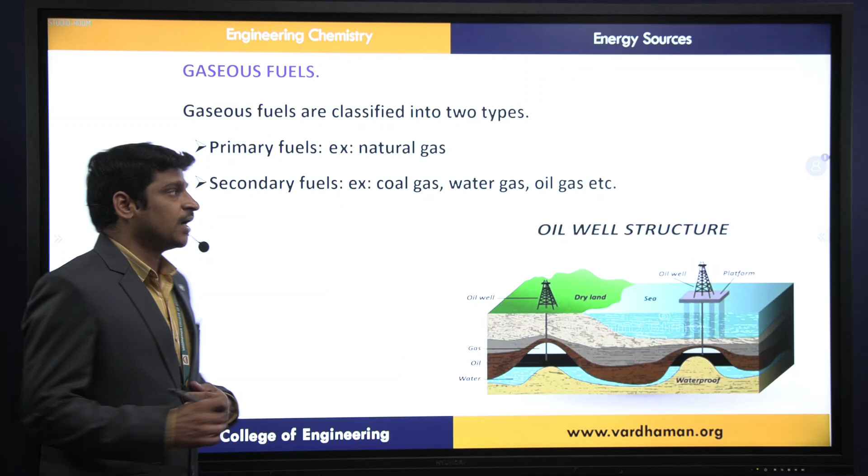Coming to gaseous fuels, as we already discussed the advantages of gaseous fuels over liquid and solid fuels, these gaseous fuels have high calorific value and low ignition temperature and burn cleanly without causing pollution. Based on origin, they are classified into two types: primary gaseous fuels and secondary gaseous fuels. Primary gaseous fuels are those originated from natural sources, best example being natural gas. From these natural gases, different gases are synthesized or fractioned, and those are called secondary fuels.

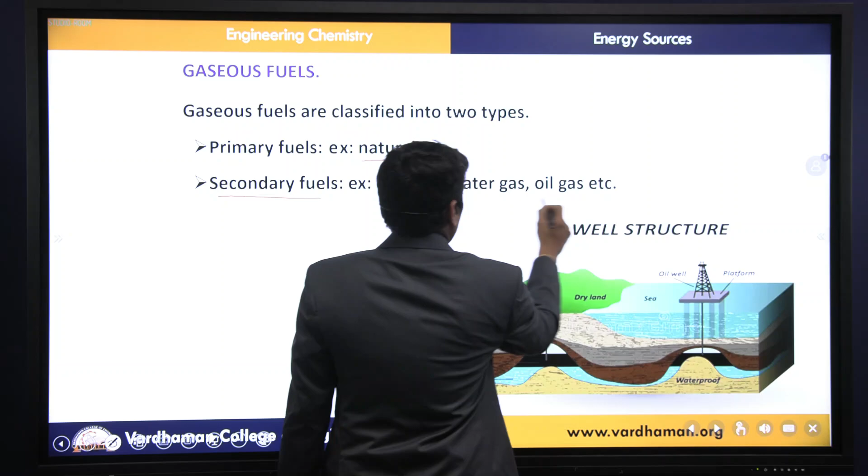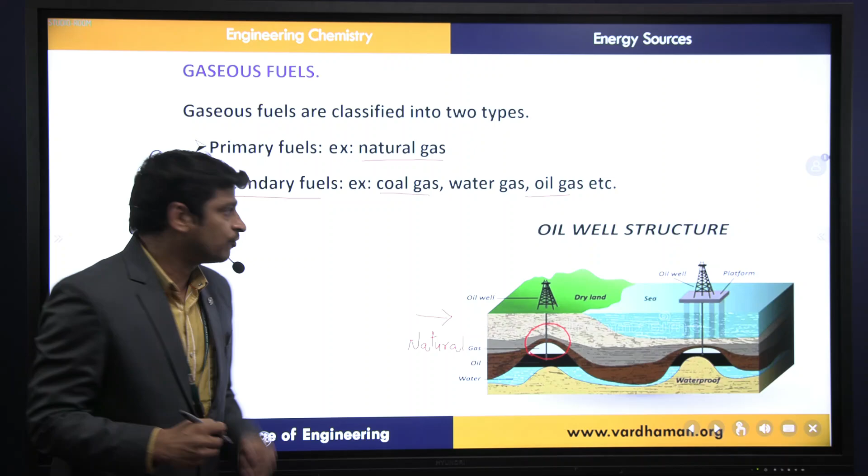For example, coal gas, water gas or oil gas. Now coming to this picture which explains oil well structure, the gases which are accompanied along with the oil in the oil wells are called natural gases. These natural gases are extracted and further treated to form secondary fuels or secondary gases.

Coming to the first type of natural gas, the composition of natural gas: it contains a maximum percentage of methane, about 88.5%, then ethane 5.5%, propane 3.7%, and butane 1.8%. It also contains little traces of pentane, hydrogen, carbon monoxide, carbon dioxide and some higher hydrocarbons in a range of 0.5%.

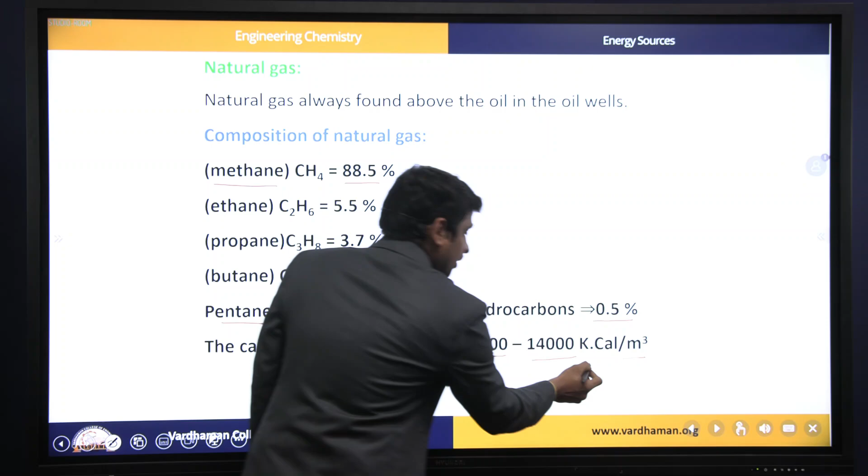The calorific value of natural gases is in the range of 8,000 to 14,000 kilocalories per cubic meter volume. The calorific value of natural gas is very high because it contains maximum methane, that is maximum carbon content, and less pollution-causing elements.

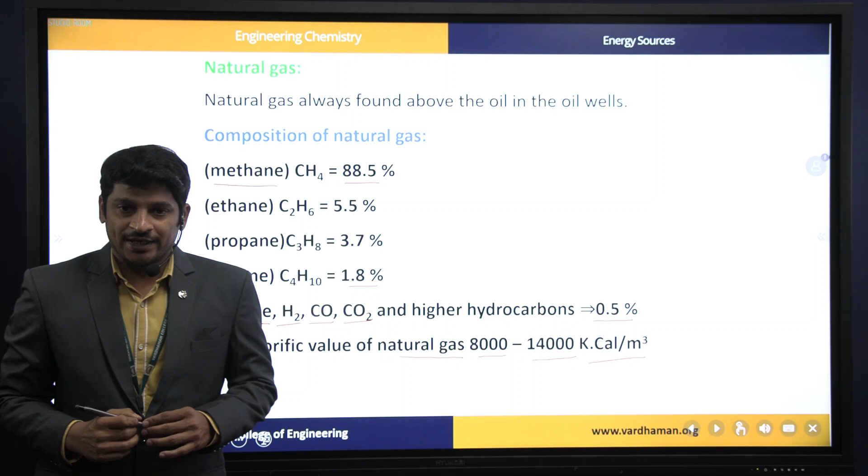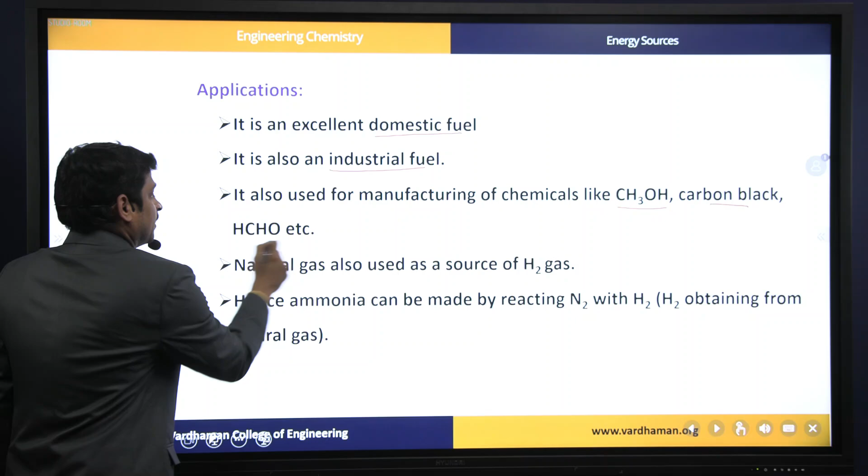Coming to the applications of natural gases: as we all know, natural gas is an excellent domestic fuel as well as industrial fuel. It is also used to prepare chemicals like methanol, carbon black or formaldehyde in the synthesis process. Natural gas is also used as a source of hydrogen gas.

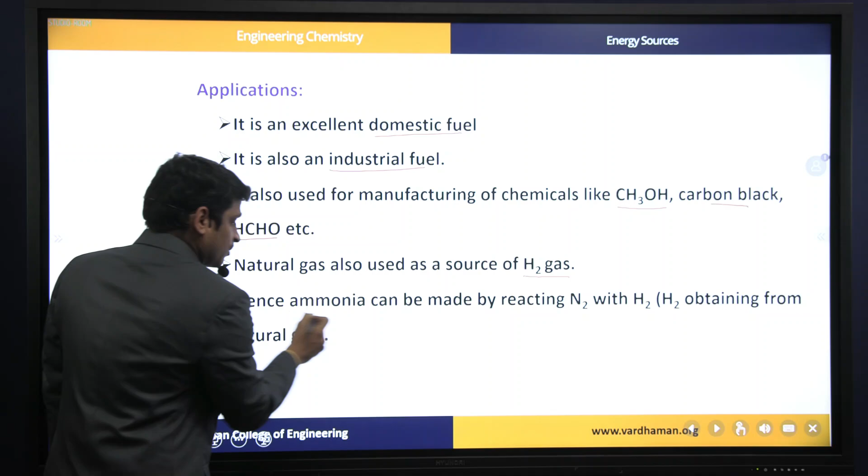From this hydrogen gas, ammonia can also be prepared by reacting with nitrogen. So this hydrogen is also extracted from natural gases. This is about the composition and applications of natural gases.

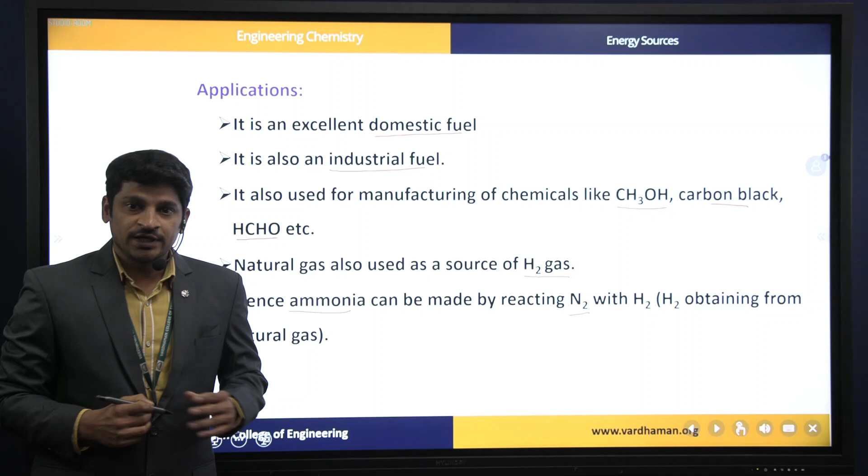Coming to the next secondary gaseous fuel, that is LPG, liquefied petroleum gas. The major composition of LPG is N-butane, isobutane and butylene, propane, and negligible amounts of propene and ethane. LPG is supplied under pressure in containers after treating with mercaptans.

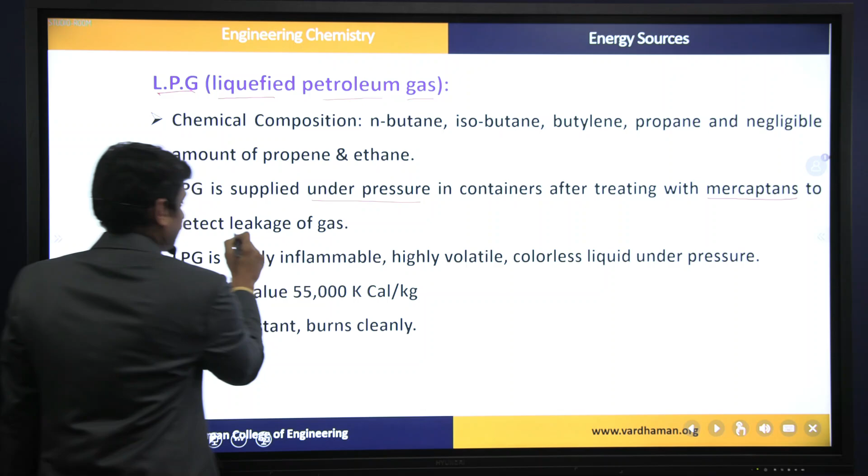These mercaptans are sulfur-containing components which help us detect the leakage of gas. Generally LPG is odorless, so it's not possible to detect leakage of LPG without mercaptans. Mercaptans are helpful for the detection of gas leakage from cylinders.

LPG is highly inflammable and highly volatile, a colorless liquid under pressure. Coming to the calorific value of LPG, it is far higher than the liquid fuels, closer to 55,000 kilocalories per kg. It is also knock resistant and burns cleanly. So these are the composition and characteristics of LPG.

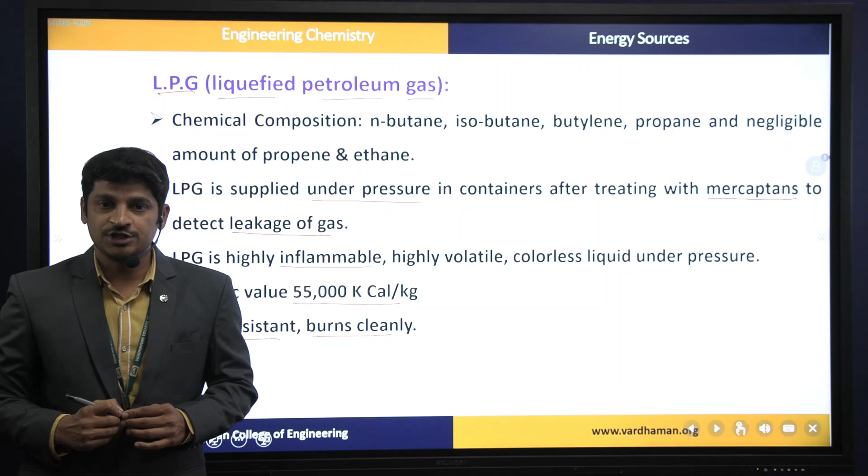Coming to the applications of LPG: it is used for heating purposes, and it is also used to produce heat as well as some electricity. It is also used in vehicles or automobiles as a fuel, so LPG is also called auto gas.

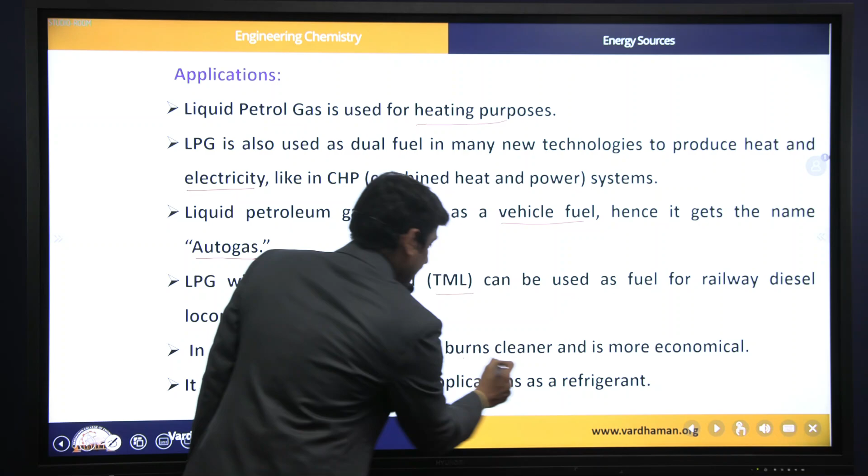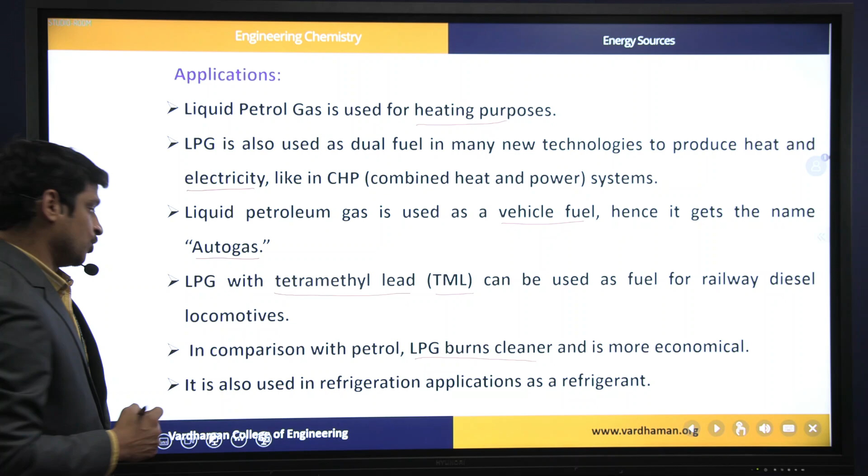LPG is also used in trains along with tetramethyl lead (TML) as a fuel, so we can use LPG as a fuel in railway engines by mixing it with TML. In comparison with petrol, LPG burns cleanly and is most economical and pollution free, and won't produce any harmful gases that cause pollution. It is also used in refrigeration as a refrigerant. So these are the applications of LPG.

Then we will discuss CNG, compressed natural gas. CNG is composed of 90% methane, the maximum percentage, and other constituents like ethane and propane, and some little traces of gases like carbon monoxide and nitrogen.

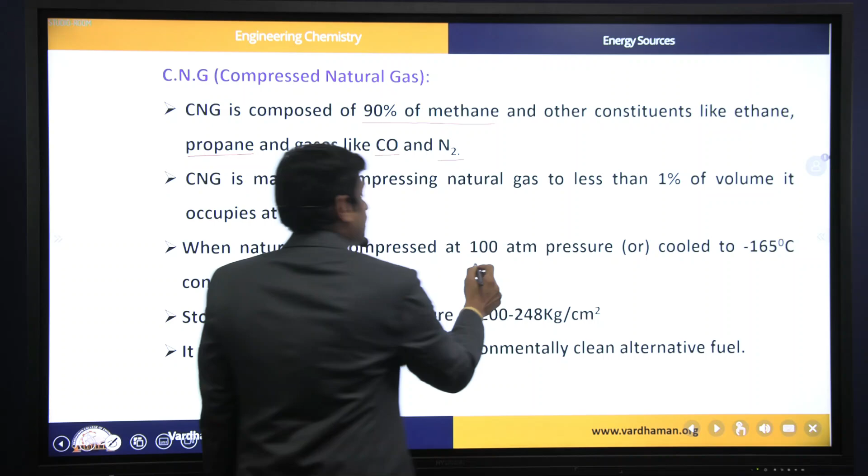CNG is made by compressing natural gas to less than 1% of its original volume at STP, standard temperature and pressure. When natural gas is compressed at 100 atmospheric pressure, or cooled to minus 165 degrees centigrade, it is converted into CNG, compressed natural gas. It is stored in containers at a pressure of 200 to 248 kg per square centimeter.

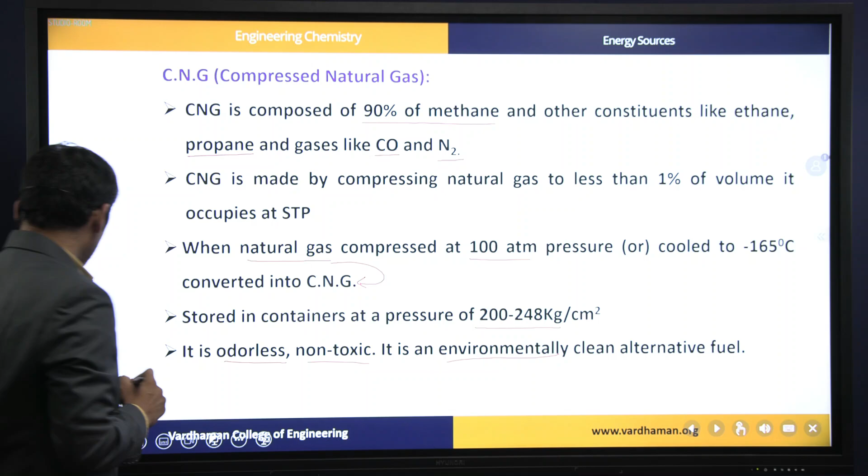So it is odorless, just like LPG, and non-toxic, an environmentally friendly fuel. It does not cause any pollution. Coming to the applications, but before that, we will discuss the calorific value.

The calorific value of CNG closely matches that of LPG, about 50,000 kilocalories per kg, and this high calorific value is because it does not contain any polluting agent. It does not have any non-combustible elements, only combustible elements, with carbon as the maximum percentage. So the calorific value is very, very high, and the energy density of CNG is 53.6 megajoules per kg or 9 megajoules per liter.

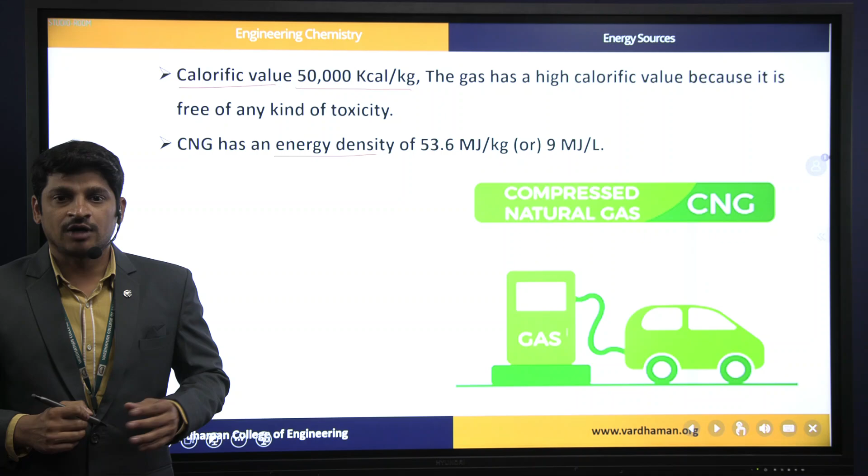Then we'll move to applications of CNG. So CNG, as we all know, is used in the transportation sector. Nowadays most research is going on in producing eco-friendly fuels, and this is a best example used in automobiles like cars, autos or bikes.

It is also used for cooking and heating purposes, and CNG is also used in drying of clothes in the dry cleaning process. Here CNG is 50% more cost effective when compared with electricity for dry cleaning purposes.

CNG is used in manufacturing of some chemicals like acetic acid, ammonia, methanol, butane, propane, ethane, etc. It is also used in the synthesis process of chemicals, and in the manufacturing of plastic and other important organic chemicals.

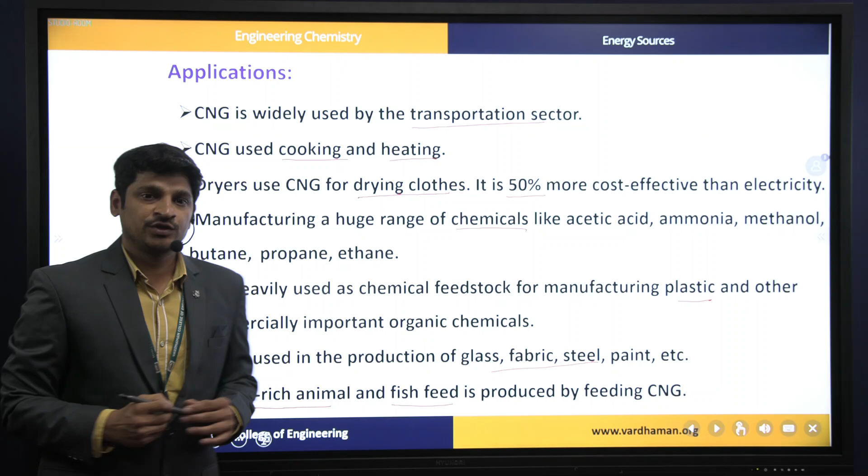CNG is used in the production of glass, fabrics, steel, paints, etc. It is also used in the preparation of protein rich animal feed or fish feed. So these are the applications of CNG.

Now coming to biodiesel. Biodiesel is a renewable fuel, and if you look into diesel, its carbon chain length may range from C15 to C18, generally used as a conventional fuel in automobiles. But there are many disadvantages in diesel, as it produces much smoke, carbon dioxide and carbon monoxide, and the cost is also very high. To obtain diesel we have been depending on foreign countries to meet fuel requirements.

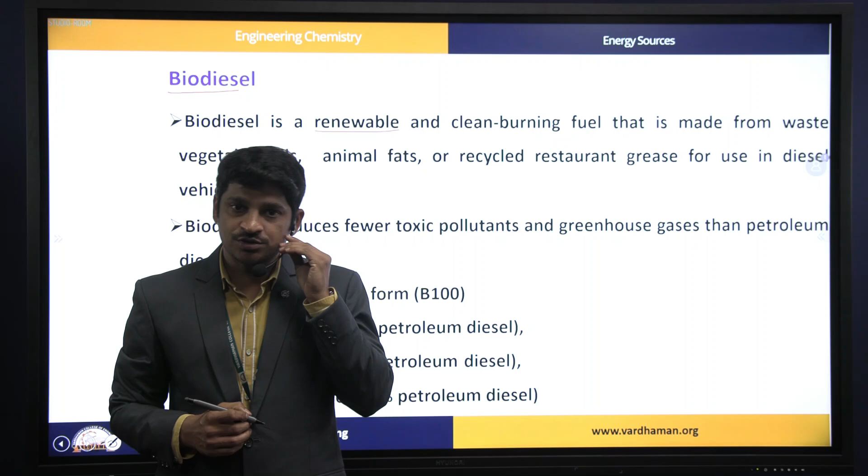But when we synthesize biodiesel from natural sources, vegetable oils, used oils or animal fats, these limitations can be overcome - pollution decreases, foreign dependence decreases, and cost is also cut down. So these are the advantages of biodiesel, and here we'll discuss the process for synthesis of biodiesel from vegetable oil or animal oil.

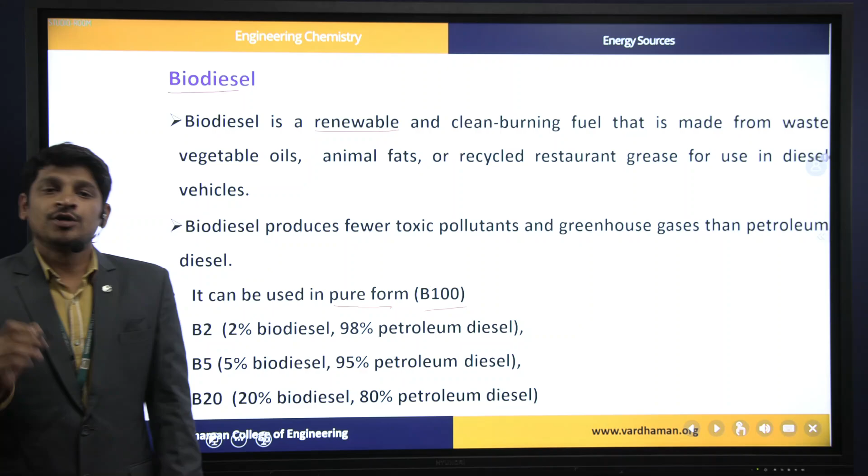It can be obtained in pure form, which we call B100, containing only biodiesel. It can also be obtained as B2 grade, containing 2% biodiesel and 98% conventional diesel. We also have B5, with 5% biodiesel mixed with 95% petroleum diesel, and B20, with 20% biodiesel mixed with 80% conventional petroleum diesel.

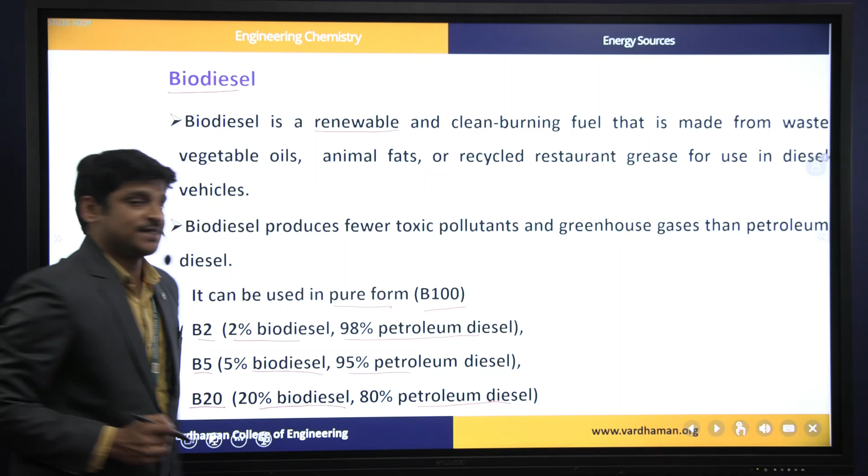Coming to the reactions of biodiesel preparation, the process is called trans-esterification. In this process, we take one alcohol and mix it with a catalyst. We can use sodium hydroxide or potassium hydroxide as catalyst. If we take methanol as alcohol and sodium hydroxide as catalyst, the sodium hydroxide splits into Na+ and OH-.

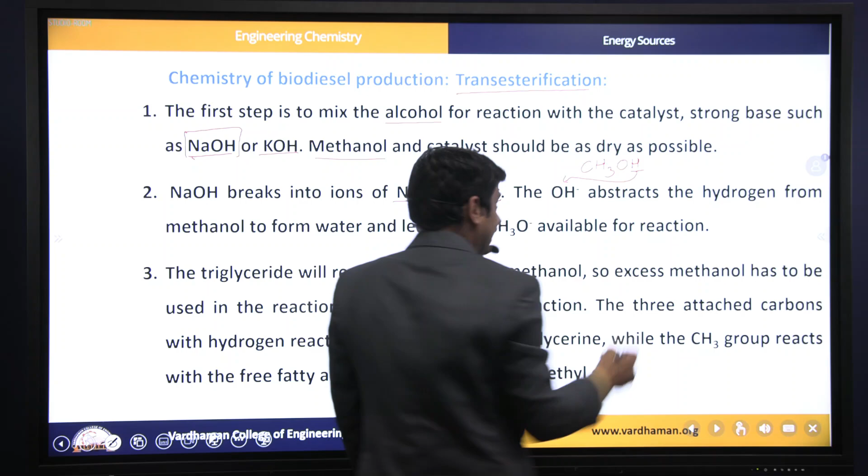This OH- will abstract hydrogen from methanol, leaving methoxide ion for the esterification process. This methoxide ion reacts with triglycerides present in oil or animal fat and results in esters of fatty acids. These esters of fatty acids are considered as biodiesel.

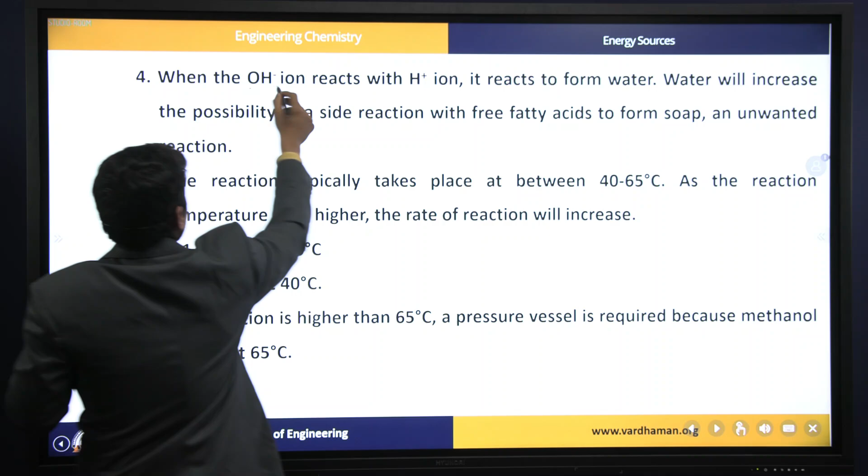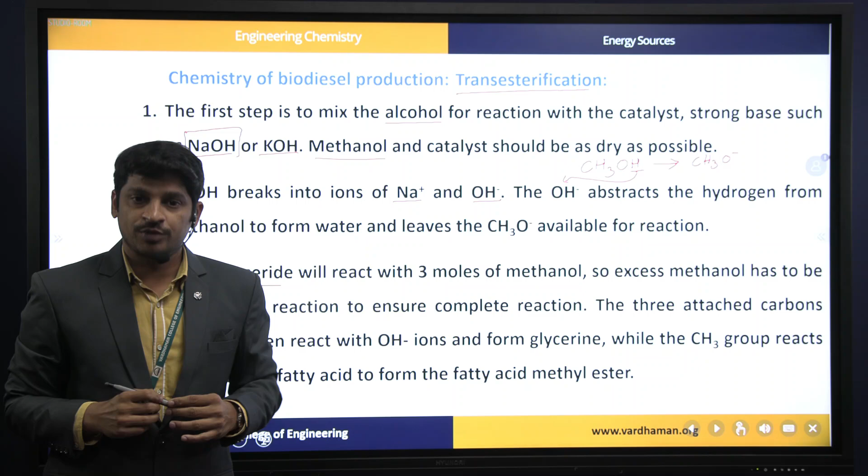The OH- and H+ ion will form water, and we have to take care that while adding methanol and sodium hydroxide, there should be no aqueous component, no water component, because excess water will lead to an unwanted reaction which might result in the formation of soap instead of biodiesel. So care must be taken not to add excess water.

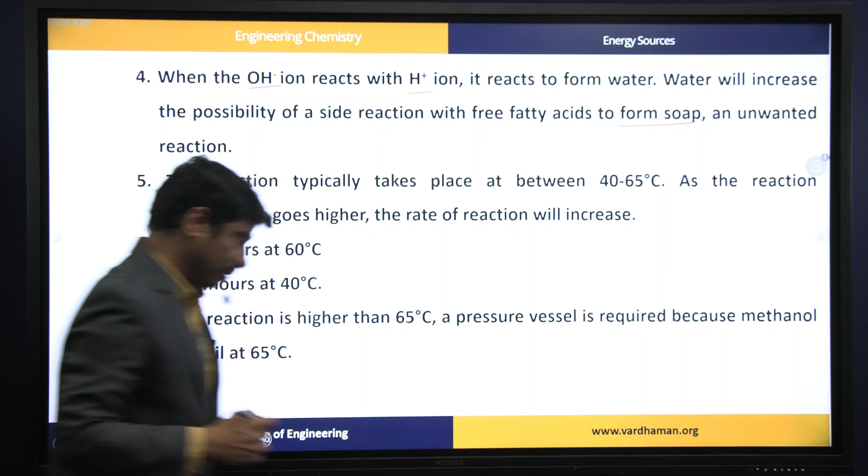We should take dry methanol and dry sodium hydroxide samples before starting the experiment. This reaction also depends on temperature, generally operated between 40 to 65 degrees centigrade. With increase in temperature, the rate of trans-esterification reaction increases and the time decreases - it takes 1 to 2 hours at 60 degrees centigrade, and 2 to 4 hours at 40 degrees centigrade.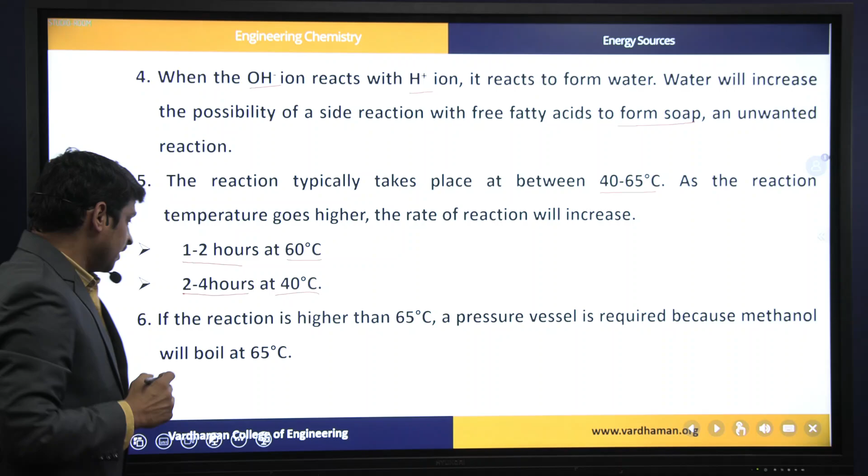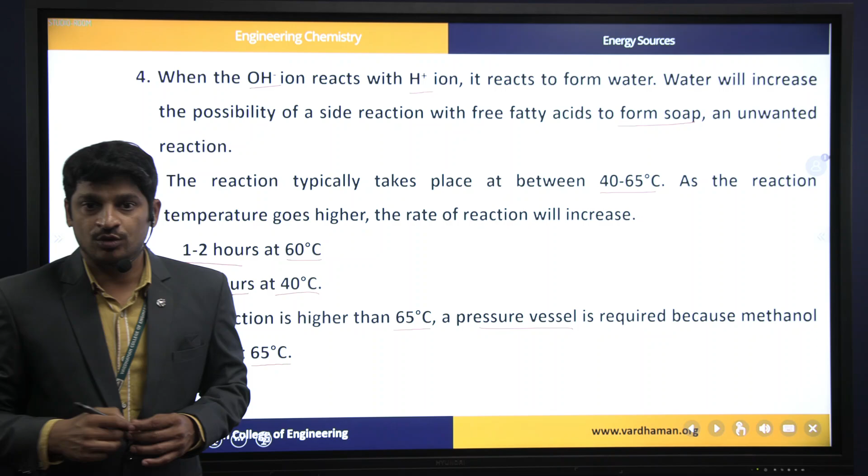If the reaction temperature is far higher than 65 degrees centigrade, we have to maintain a pressure vessel, because methanol starts boiling at 65 degrees centigrade, so there is a chance of methanol escaping as vapors. This covers the steps involved in the trans-esterification process.

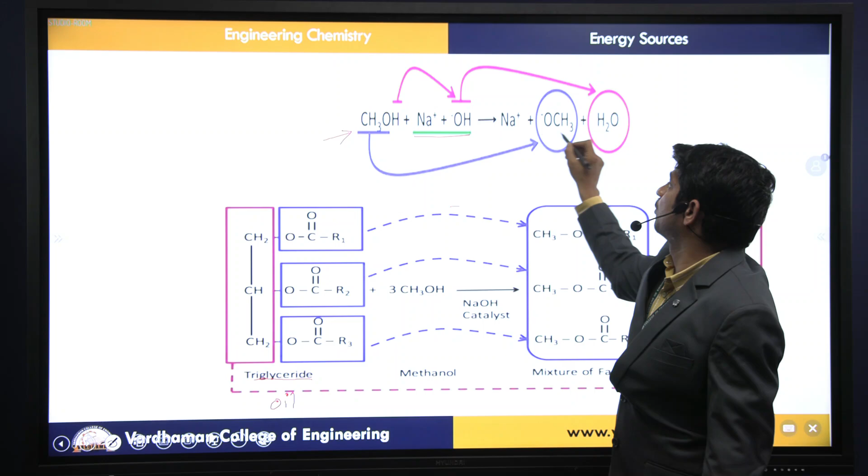Now we'll discuss the reaction. Methanol is a precursor material, and we use vegetable oil or animal fat here - oil, nothing but triglyceride. Methanol is first reacted with sodium hydroxide, which abstracts H+ from methanol and leaves methoxide ion. This methoxide ion reacts with the triglycerides present in oil to form mixtures of fatty esters.

The major composition of oil is triglyceride, and the triglyceride takes excess of methanol - it requires 3 moles of methanol. So we need to add excess methanol to the reaction mixture along with sodium hydroxide as catalyst.

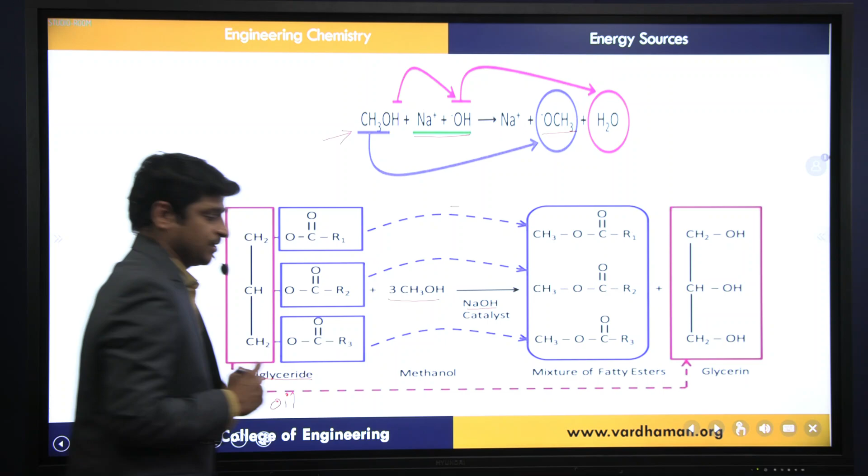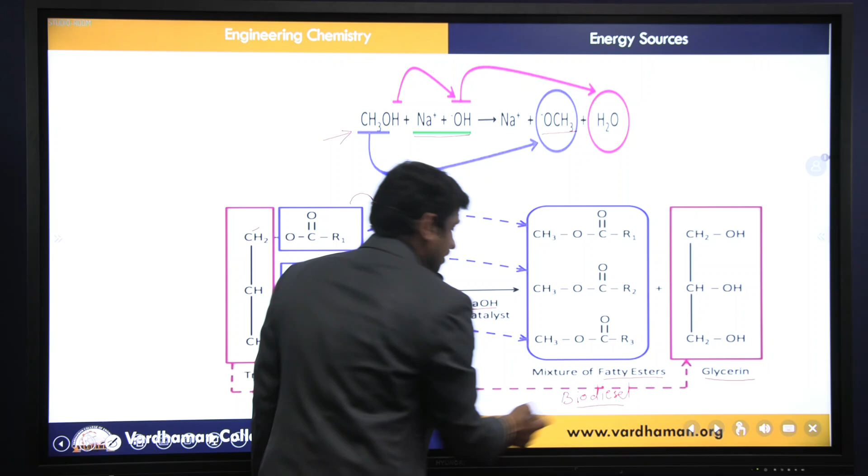Sodium hydroxide abstracts this H plus and leaves methoxide ion. This methoxide ion reacts with triglycerides, leading to the formation of esters of fatty acid. These fatty acid esters are considered biodiesel. The carbons present in triglycerides react with OH forming glycerin. So we get two products here, biodiesel as one product and glycerin as a second product.

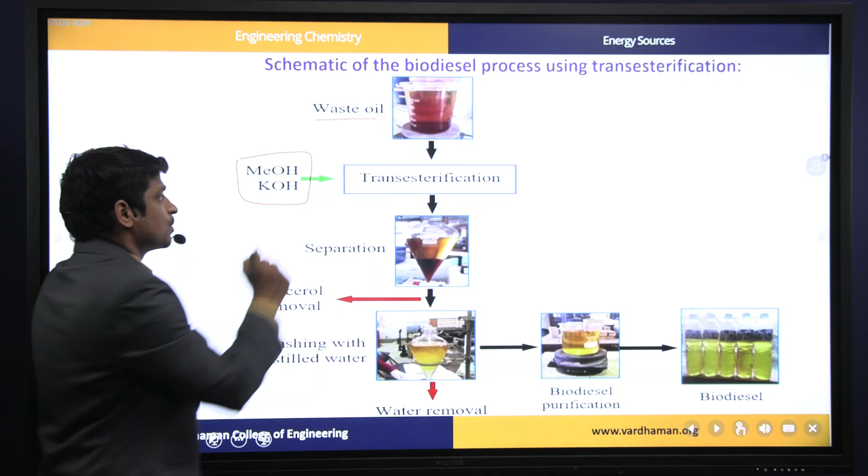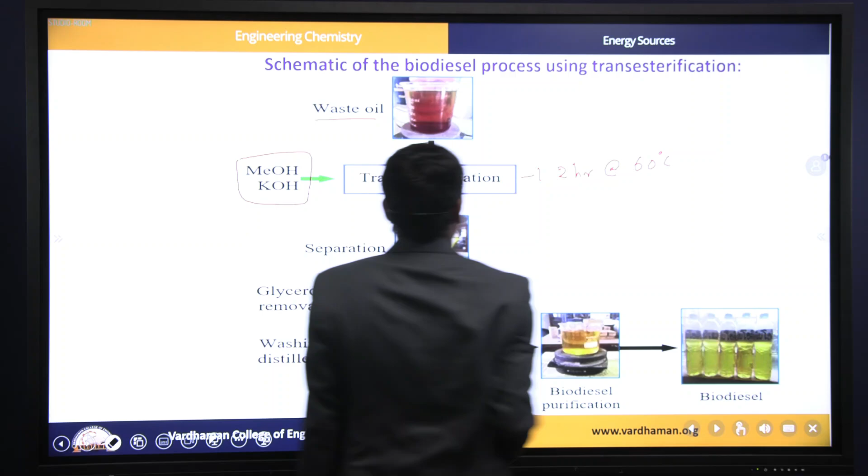Here is the schematic representation of trans-esterification. First we take used oil. To this used oil we add catalyst and methanol, and trans-esterification takes place if we leave it for 1 to 2 hours at 60 degrees centigrade.

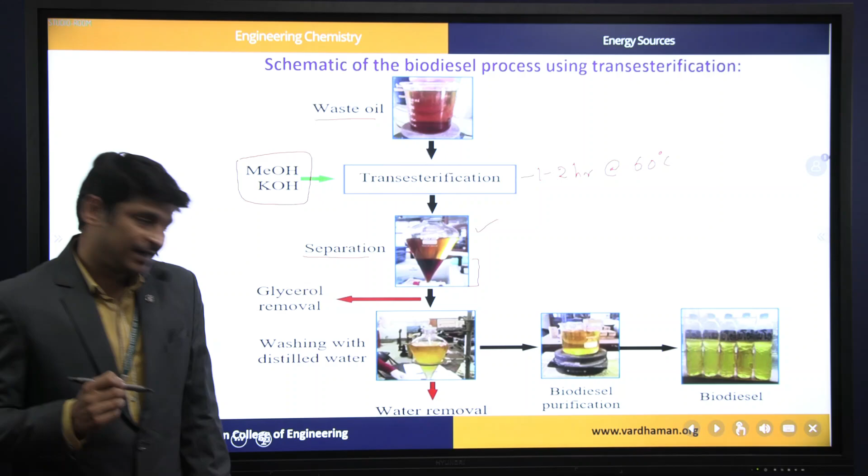Trans-esterification results in the formation of two products, one is biodiesel and the next is glycerin. These can be separated using a separating funnel. Glycerin, being denser, settles at the bottom portion of the separating funnel, which can be discarded. Then later the upper portion is collected, which is nothing but biodiesel.

The upper portion is simply collected and can be washed through water so that any impurities present are washed off. So finally biodiesel, after purification, can be collected or stored in bottles. This is the process of biodiesel synthesis. The name of the reaction is trans-esterification.

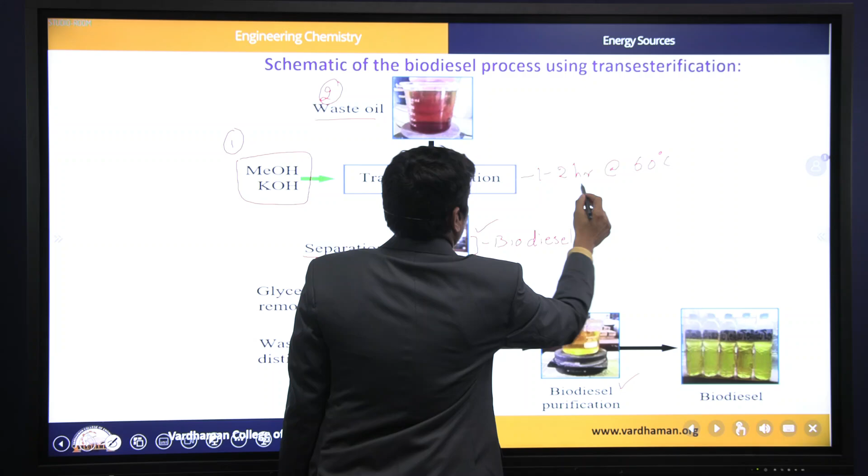Here we need methanol and one catalyst, and we need used vegetable oils or animal fats. The reaction is called trans-esterification, which might require 1 to 2 hours of time by maintaining a temperature of 60 degrees centigrade. We will get two products, one is biodiesel, the next is glycerin.

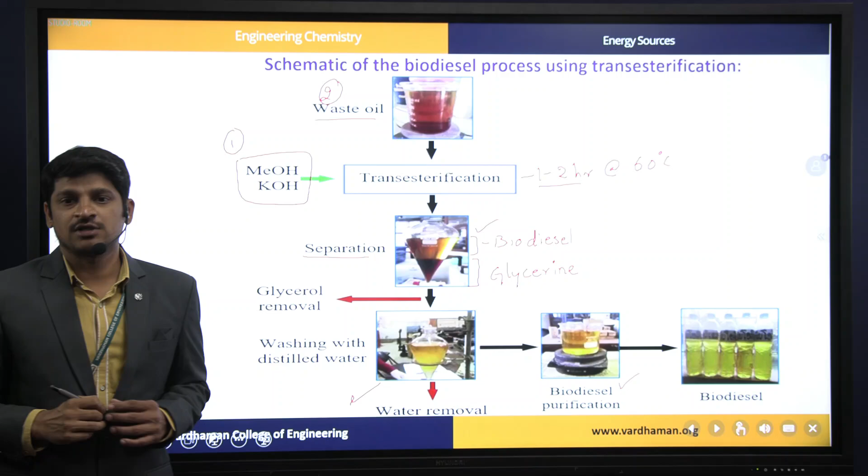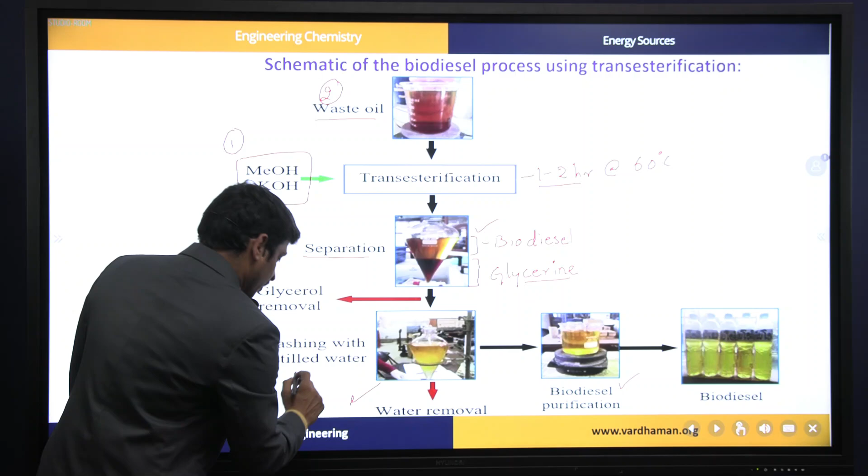We get two products, biodiesel and glycerin, which can be separated using a separating funnel. The bottom portion will be occupied by glycerin because its density is higher compared to biodiesel, and from the top portion biodiesel is collected. The biodiesel is washed with water to remove excess impurities, and finally it can be stored. This is the process of trans-esterification.

Next we'll discuss the biodiesel cycle, because we already discussed in the first slide that this is a renewable source. How does it become a renewable source?

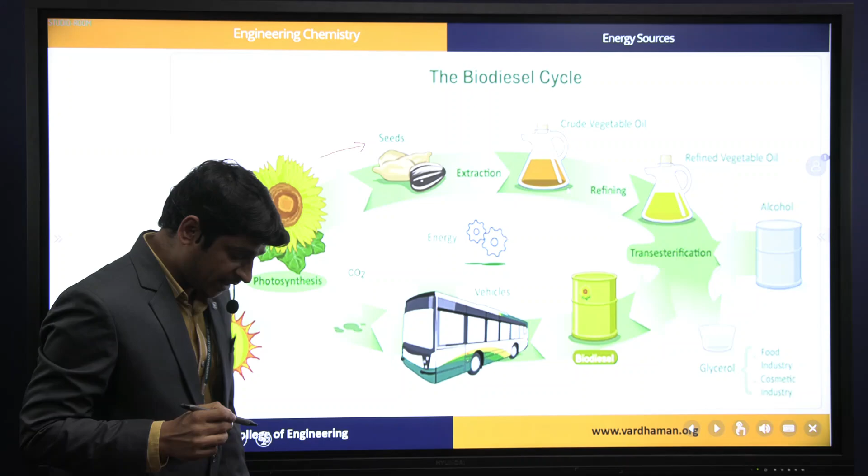If we consider oil crops like sunflower or groundnut, seeds are collected from these plants, and from these seeds raw or crude vegetable oil is extracted. It is refined to remove impurities, and this refined vegetable oil or animal fat is mixed with alcohol.

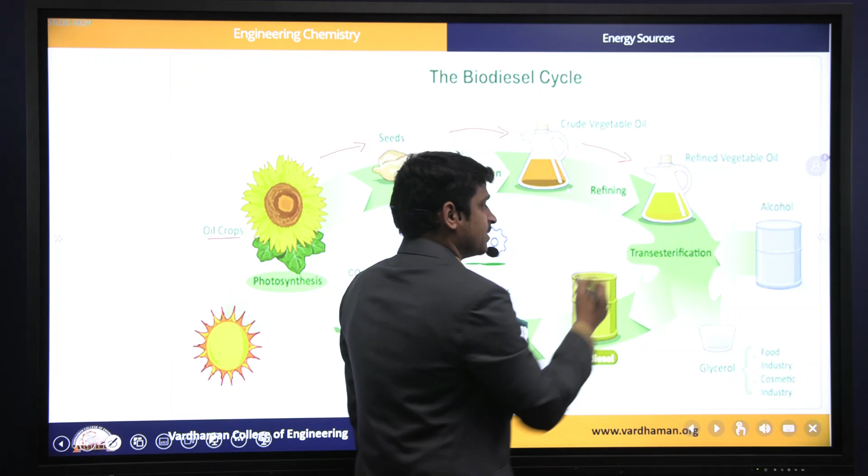That means we are doing trans-esterification on these refined vegetable oils with the help of methanol and potassium hydroxide, and here we get two products. After trans-esterification we get one product as biodiesel, and the next byproduct is glycerol or glycerin.

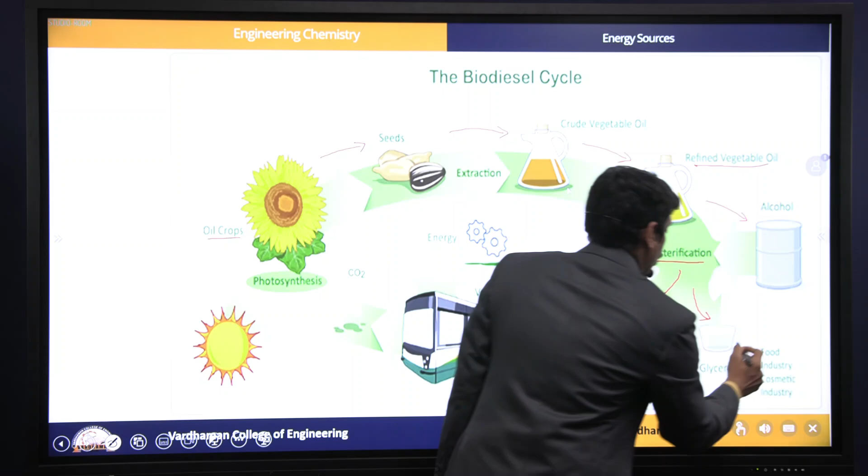This occupies the lower portion in the separating funnel, so glycerin can be removed first, then we can collect biodiesel, and we can use this biodiesel in the existing diesel engines as it is. The main advantage of biodiesel is it can be used in conventional diesel engines, with no need to prepare separate engines for biodiesel utilization.

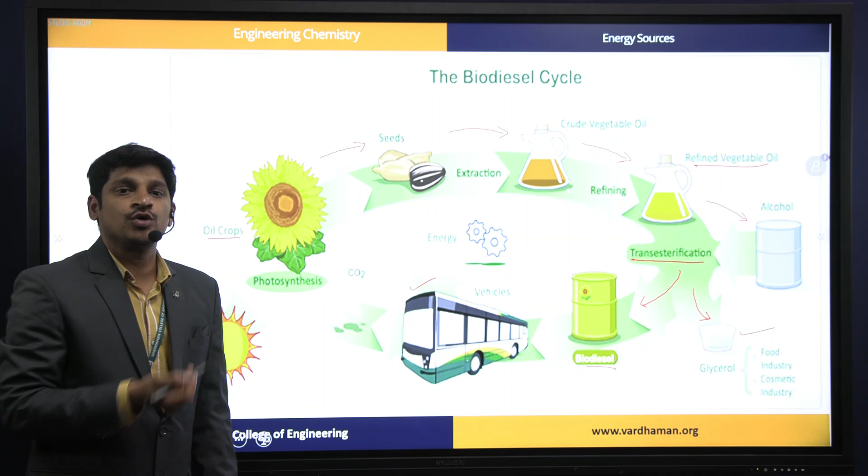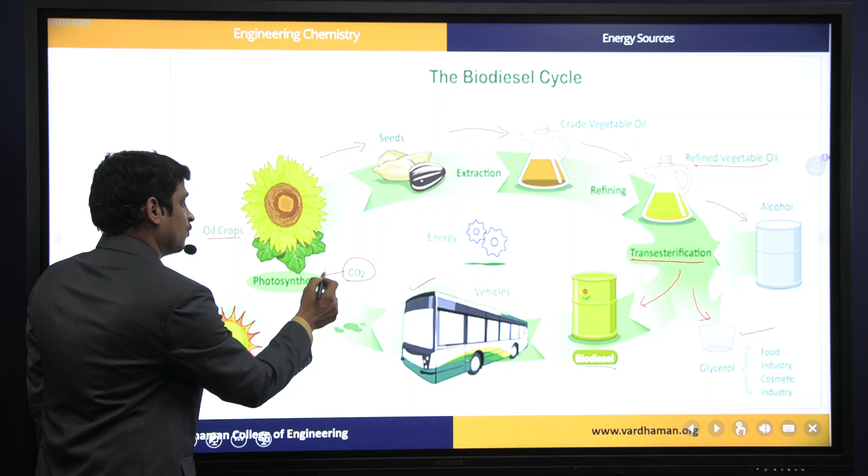How are we going to recycle it? Through combustion of this biodiesel, which causes some emission of carbon dioxide, and this carbon dioxide is again used in the process of photosynthesis, which helps the oil crops grow. In this manner the biodiesel cycle can be maintained at neutral, and we consider biodiesel a renewable source.

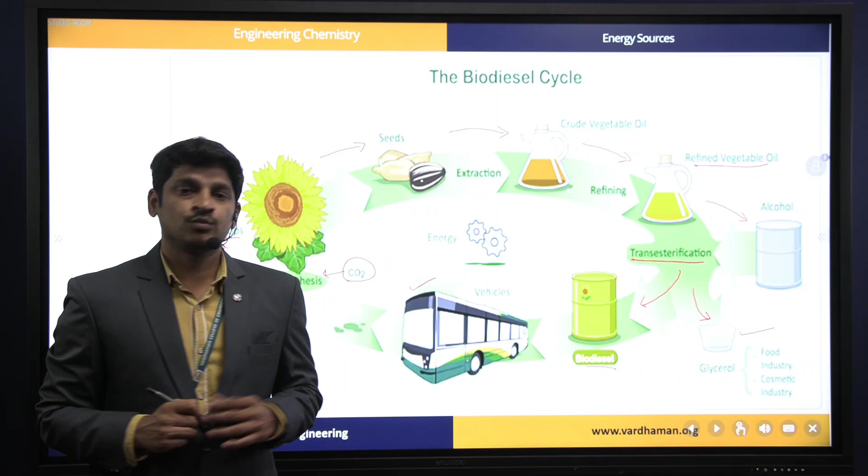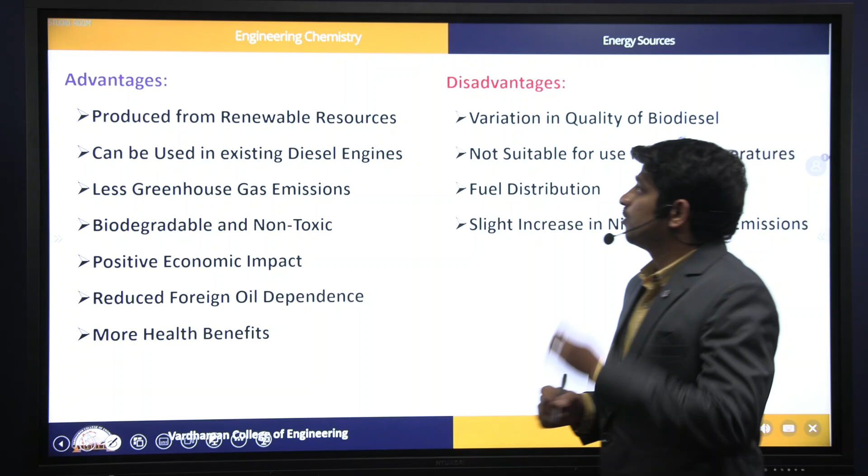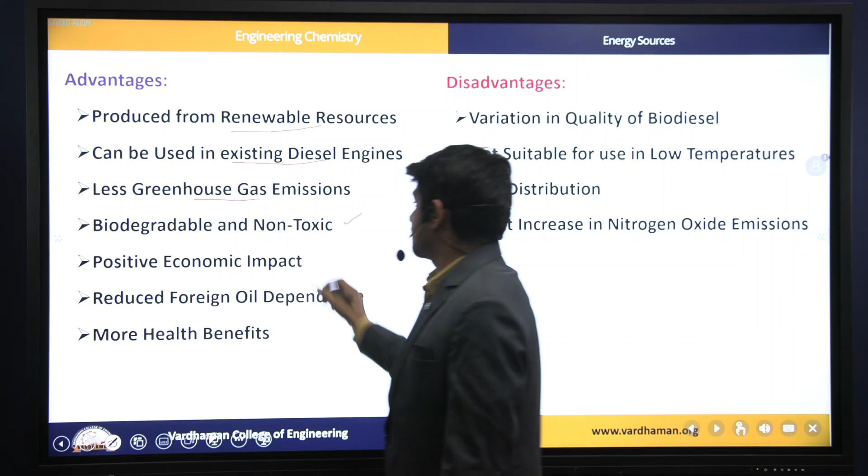With this diagrammatic explanation, we will now discuss advantages and disadvantages of biodiesel. Coming to the advantages: biodiesel can be produced from renewable sources, it can be directly used in existing diesel engines, and there is less greenhouse gas emission. It is biodegradable and non-toxic, and has a positive economic impact, meaning the cost is less.

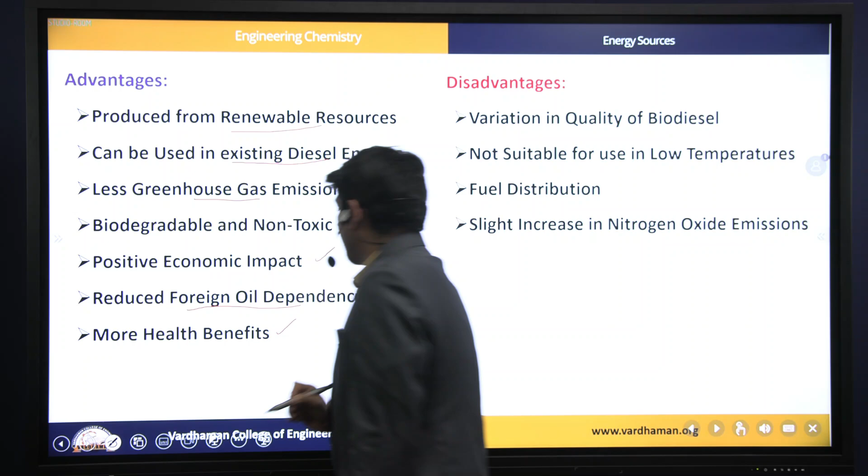Foreign oil dependence can be reduced easily; we can produce our own biodiesel simply, and it shows some health benefits also because the pollution is zero or negligible.

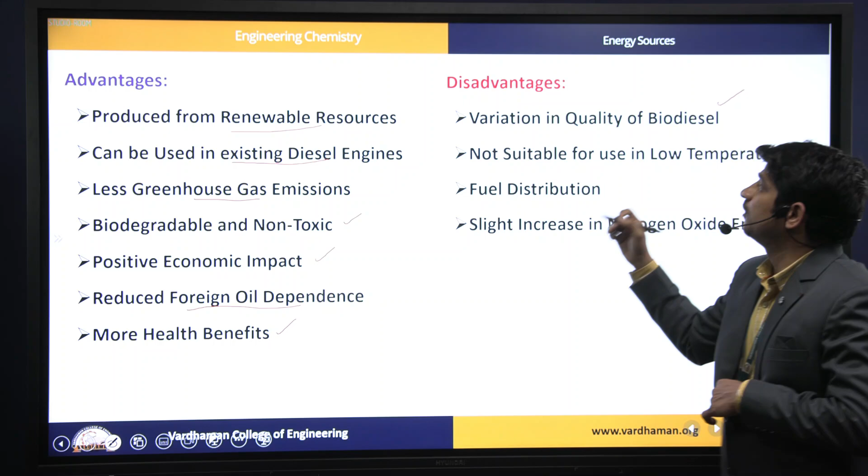Coming to the disadvantages: you'll find some variations in the quality of biodiesel. Not all biodiesel synthesized from different biodiesel plants has the same quality, so we'll have some variations in quality. It is not suitable for use in low temperature because it is made from oils, so it can solidify at low temperatures, and fuel distribution in the internal combustion engine is not uniform. That is also one of the disadvantages.

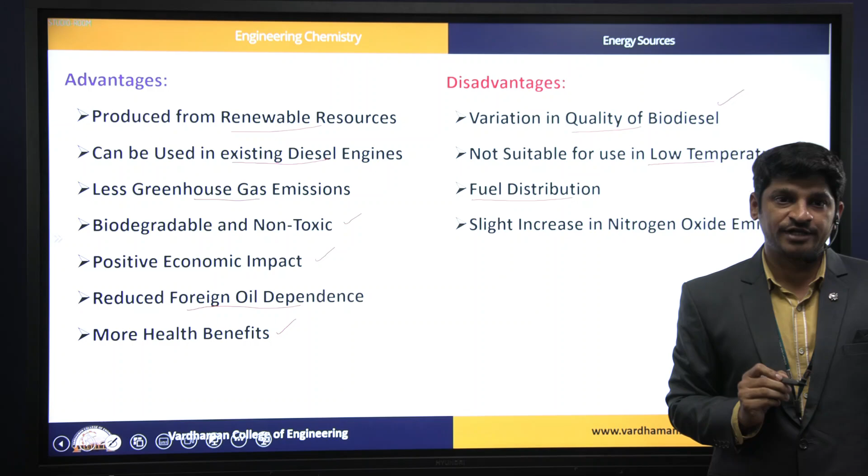It slightly increases nitrogen oxide emission, which might cause some pollution. So these are the disadvantages of biodiesel.

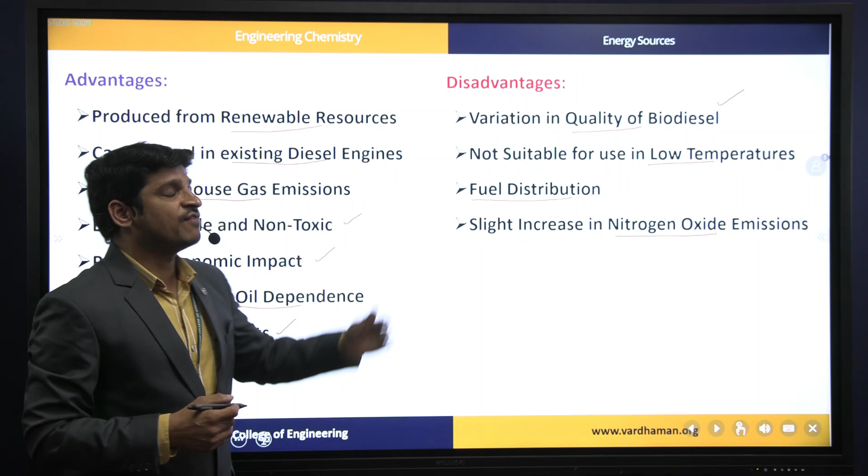So we have so many advantages. Apart from these advantages, we have some fewer disadvantages also regarding biodiesel. In this video we have covered some examples of gaseous fuels and biodiesel synthesis from vegetable oil or animal fat by using trans-esterification reaction.